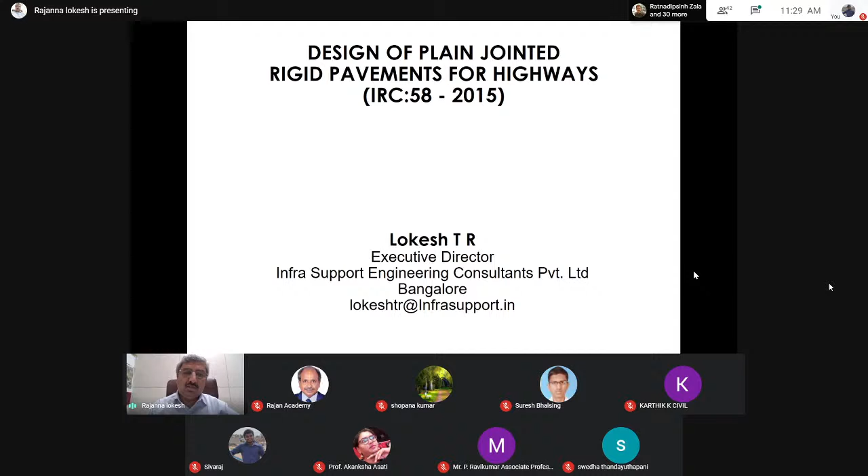IRC 58 2015 was first scheduled. The IRC code was first given by Indian Roads Congress in the year 1974. Currently we have the latest revision, IRC 58 2015. The biggest difference between the earlier version and this version is we are now having a laden commercial vehicle weight varying from 8.1 to 10.2 tons. So this will be my presentation structure for the day.

We will know what are the different types of pavement in the introduction, and what are the different types of concrete pavements that a designer can design, and what is the scope of IRC 58 2015, design of rigid pavements as per IRC 58. We will also take up a small case study, because along with the code, IRC 58 has also supplied an automated Excel sheet where you can input all the required design parameters and arrive at and check the design requirement.

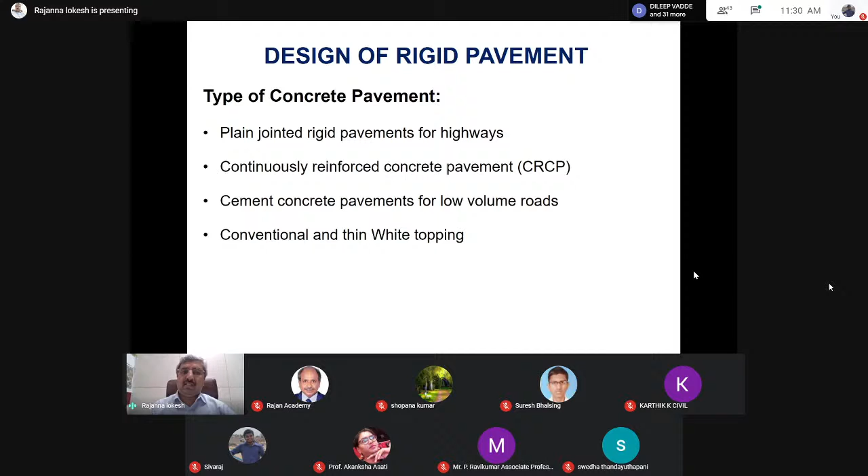When it comes to the different types of concrete pavements that a designer has the privilege to work with in the Indian context, we have plain jointed rigid pavement for highways - state highways, national highways, as well as expressways; continuously reinforced concrete pavement, also called CRCP; concrete pavement for low volume roads; and conventional white topping, or thin and ultra-thin white topping. This white topping topic will be discussed in detail by my next speaker, Sri Jaishankar sir. So we will just understand the various differences among these types of pavements.

There is a transverse joint at every 4.5 meters, also called a dowel joint, with dowel bars provided. There will be a longitudinal joint at a spacing of 3.5 meters, running parallel to the center line of the road, which makes the pavement into slabs, or panels, generally sized 3.5 by 4.5 meters.

The top surface of the pavement will have a texture, either in the longitudinal direction or in the transverse direction. In most Indian roads, you can see the texture in the transverse direction, but abroad, we can see some roads with longitudinal texturing.

The thickness of concrete pavement, designed as per IRC 58, generally varies between 150 mm or 200 mm up to 350 mm. The grade of concrete generally used for pavement concrete has a minimum of M30, and can go up to M50 or M60, but in most cases M40 is the pavement quality concrete, or PQC, that is always adopted.

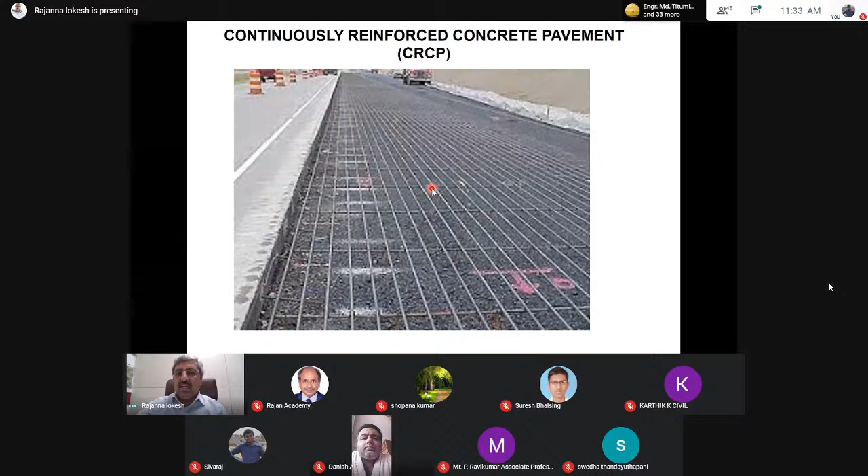All other parameters with respect to conventional pavement remain the same, like pavement quality concrete and texturing. The only difference is that providing the transverse and longitudinal reinforcement results in a reduction of pavement thickness.

We are supposed to ascertain the existing strength of the flexible pavement, then remove functional failures such as light cracks on the surface by a process of milling, then go with the concrete overlay. For the concrete overlay, the pavement quality concrete remains as M40, or minimum grade is M30.

These are the various codes available for the design of concrete pavement: IRC 58-2015 guidelines for the design of plain jointed rigid pavement. IRC 118 helps us understand design guidelines for continuously reinforced concrete pavement. Low volume roads can be designed using IRC SP 62-2014. White topping design can be carried out using IRC SP 76-2015.

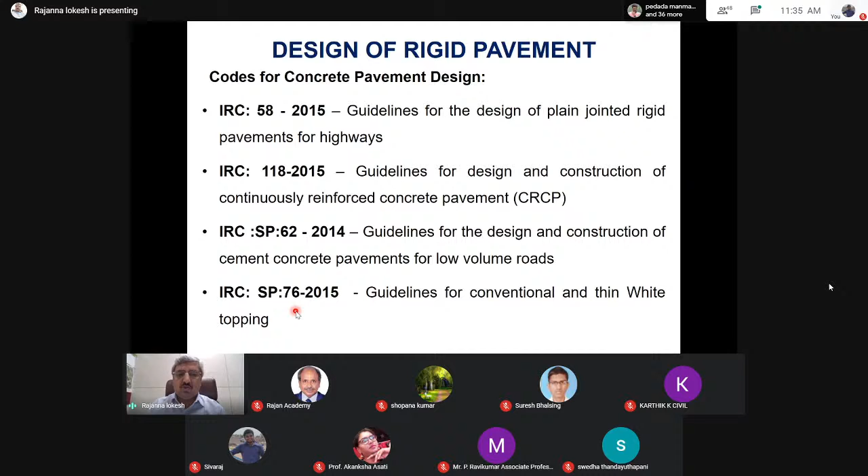When it comes to the scope covered in IRC 58-2015, it is the design of plain jointed concrete pavement with and without tied concrete shoulders. This is applicable for roads where the commercial vehicles per day is more than 450, commercial vehicles meaning individual vehicles weighing more than 3 tons.

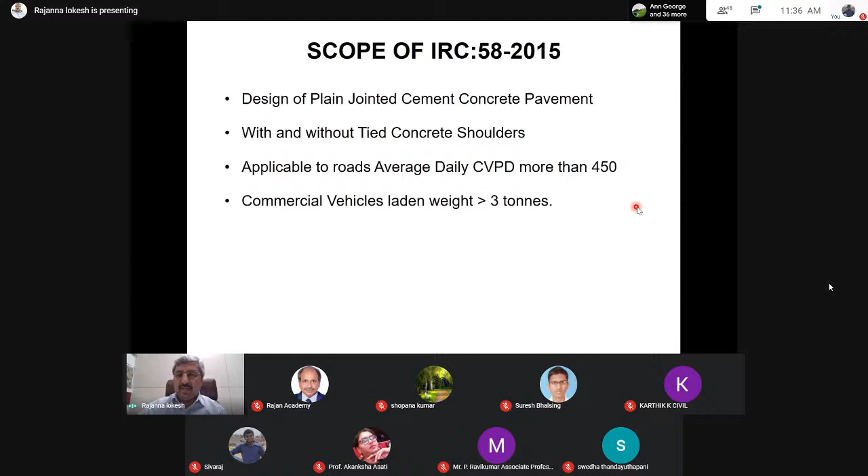When it comes to concrete pavement, there are several types that can be designed depending upon the climate, availability of material, soil type, and the experience that a designer has.

As I told you, the economy of the pavement design is all the more important. So depending upon the cost, the suitability of materials that can be used for a debonding material can be varied.

What are the factors that govern the design of a rigid pavement? First is the design period, design commercial vehicles, composition of traffic in terms of single, tandem, as well as tridem, multi-axle, axle load spectrum, tire pressure, lateral placement characteristics, directional distribution, strength of foundation, and climatic conditions. These are the factors that govern the design of rigid pavement.

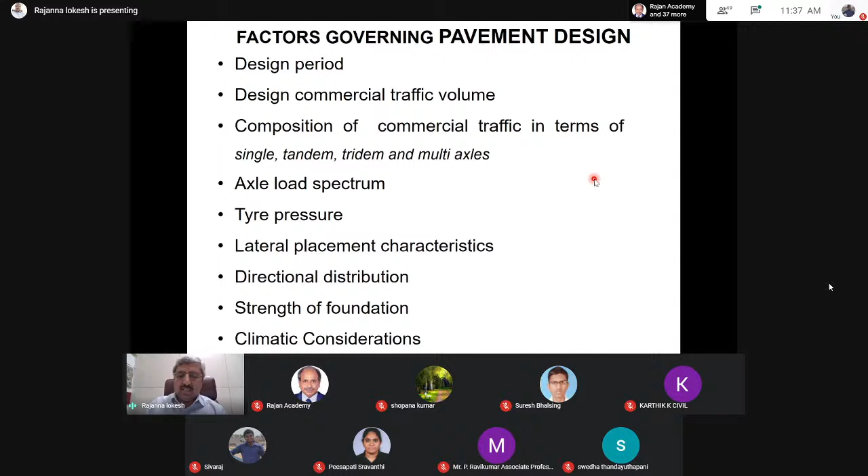Let us see individual parameters. Design life: generally, concrete pavements, unlike flexible pavements which are designed for a 15-year design period, are designed for a span of 30 years.

It is all the more important for us to judge the design period depending upon the traffic volume, uncertainty of traffic growth, capacity of roads, and possibility of widening of the road.

Assume there is an existing road with two lanes having some capacity. If it is to be designed for a concrete pavement of 10-meter width, as far as IRC 73 is concerned, the minimum width of carriageway for a two-lane is 10 meters with 1.5 meters as paved shoulders. Considering it as 10 meters, if you decide to go with concrete pavement for a two-lane, and if based on capacity it warrants a 4-lane in the next 5 years or less than 10 years, it would be difficult to convert the bi-camber into a unidirectional camber, which is given for a 4-lane road.

Thus, it is all the more important to assess the traffic volume, traffic growth, as well as widening that is going to happen in the next 15 to 30 years.

Then, it is important to understand the design lane. When it comes to IRC 58 designs for a two-lane road, both lanes are considered as design lanes, whereas for 4-lane or multi-lane roads, the outer lane is considered as the design lane. This is because it is always expected that heavy traffic will take the outer lane and faster moving vehicles will take the inner lane.

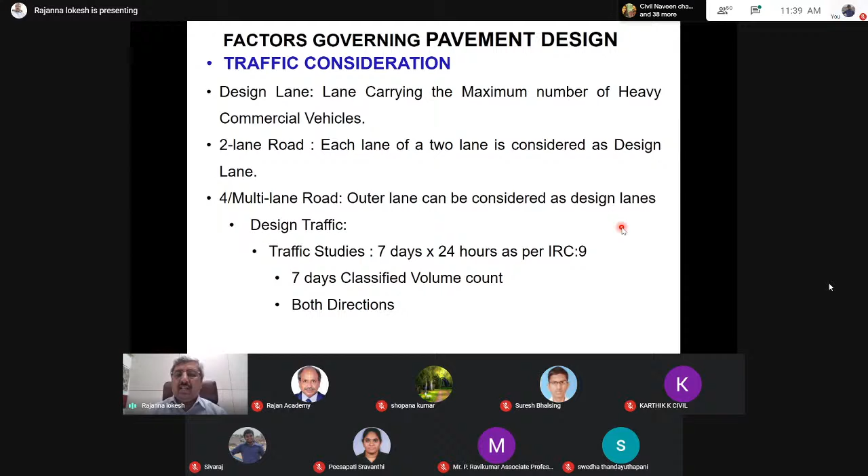It is important for us to study the traffic, based on studies for 7 days, 24 hours as per IRC 9. The traffic studies shall be carried out as classified volume counts in both directions.

Traffic growth rate is an important parameter in deciding the base traffic as well as the projected traffic for the next 30 years. As per IRC 84, which is the codal provision for the design of 4-lane highways, 5% is the recommended growth rate, which can also be determined using appropriate methods.

Traffic count is required to be carried out both in day and night, because day traffic will be responsible for bottom-up cracking, whereas night traffic will be responsible for top-down cracking.

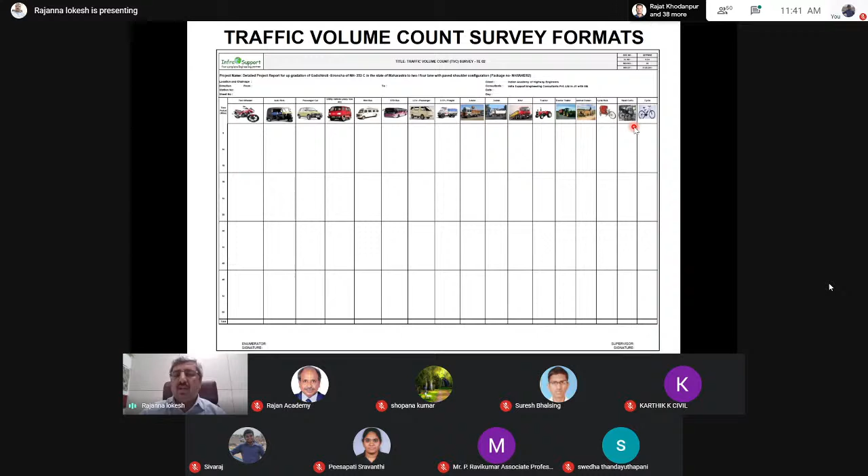Here you can find all the different categories of vehicles that should be counted, which is also the reason it is called classified volume count. So these are the various categories of vehicle.

Some of the vehicles will not have any role to play in the design of rigid pavement, but at the same time, these are the categories of vehicle which help us understand the capacity of the road. Whereas those vehicles which are more than 3 tons, specifically buses, 2-axle, 3-axle, and multi-axle trucks, will definitely contribute their presence in the design of concrete pavement.

So this is how the formats will be filled in at the site, wherein for every 15 minutes the count will be summarized, and for 1 hour we are going to summarize the data.

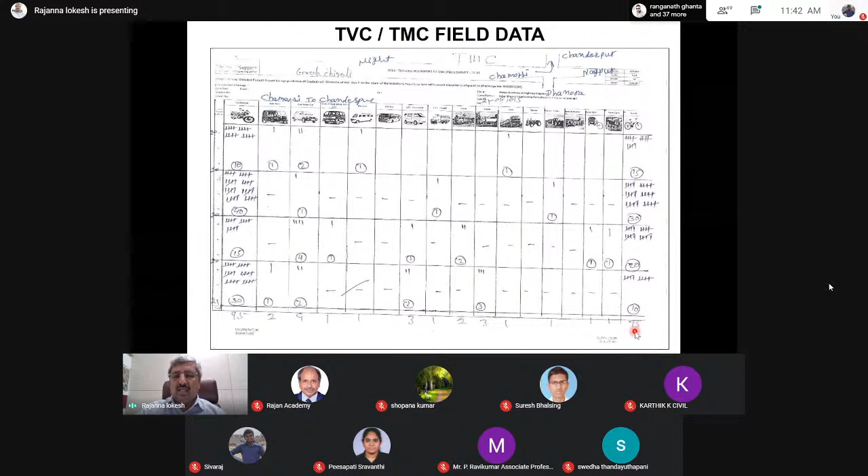Another important survey that has to be taken care of during the traffic survey is the origin and destination survey. Origin and destination survey generally will help us in arriving at the growth factor for the period.

Generally, the roadside interview method will be followed in conducting origin destination survey, where a series of questions will be asked to the driver, like what is the duration, what is the frequency in which he uses this road, what is the commodity, from where he is coming, and where it will be delivered, what is his duration of utilizing this facility.

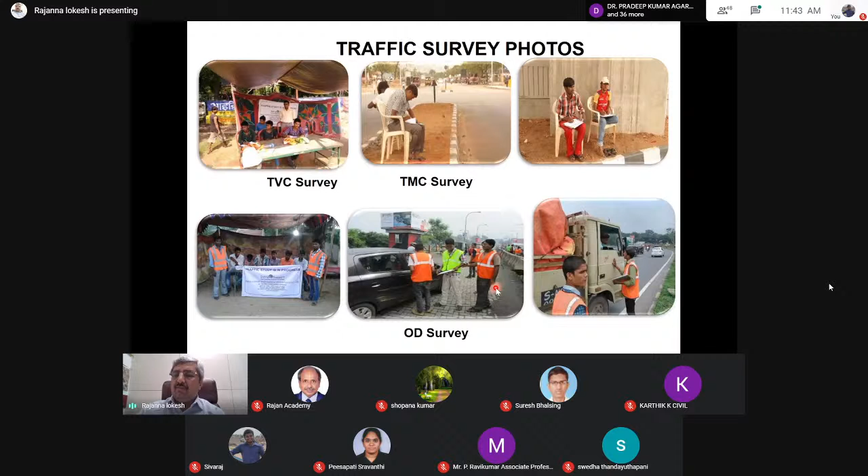So like this, a series of questionnaires will be done. This data will also be useful for us to analyze the OD matrix as well as OD zoning, from which we can arrive at the growth factor.

Then coming back to lateral placement characteristics, it is something like when a loaded truck moves towards the edge of the pavement, the structural stresses caused by the axle load at the bottom for bottom-up cracking will be much higher.

So it is always advisable to keep the vehicle at least 150 mm away from the longitudinal edge, so that the stresses at the edge get reduced. That is the reason even when we design the pavement, after which we design the dowel bars, the first dowel bar is kept at a distance of 150 mm from the edge, so that the edge flexural stresses are reduced.

For the design consideration, as per IRC 58, for 2-lane, 25% of the total commercial vehicles on both directions are considered. Whereas in case of 4-lane and multi-lane design of rigid pavement, 25% of the total traffic, which is predominant on the directional movement, is considered for the design.

Then coming back to the design parameters, top-down cracking. The design traffic for top-down cracking is a fraction of the design considered for bottom-up cracking.

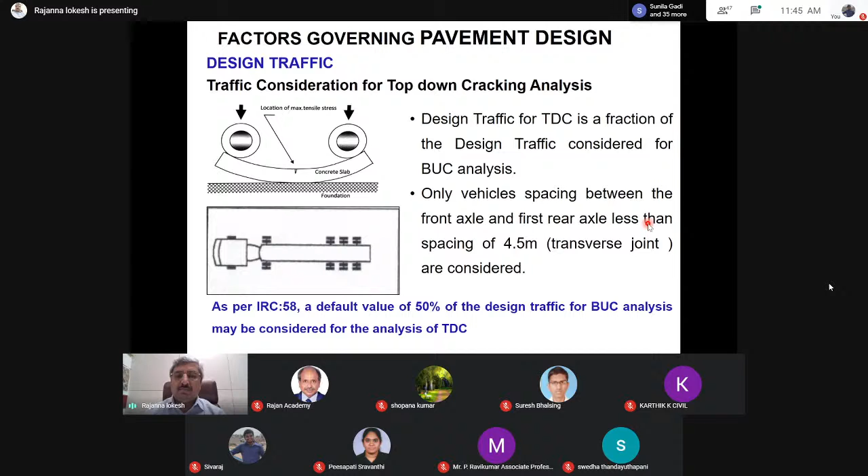Then another important parameter to understand is to find out the expected number of repetitions in terms of MSA. Though this does not play a very vital role in the design of rigid pavement, it is important to back-calculate and check what will be the front axle weight that is going to be taken into account in case of bottom-up fatigue damage.

When it comes to axle load survey, though the legal axle weight for single, tandem, and tridem vehicles is around 10.2, 19, and 24 tons, it is always observed at the site that the vehicles are being loaded much higher than the legal limits. So it is important for us to capture these axle loads from the site, and that will form an input for the design of rigid pavement.

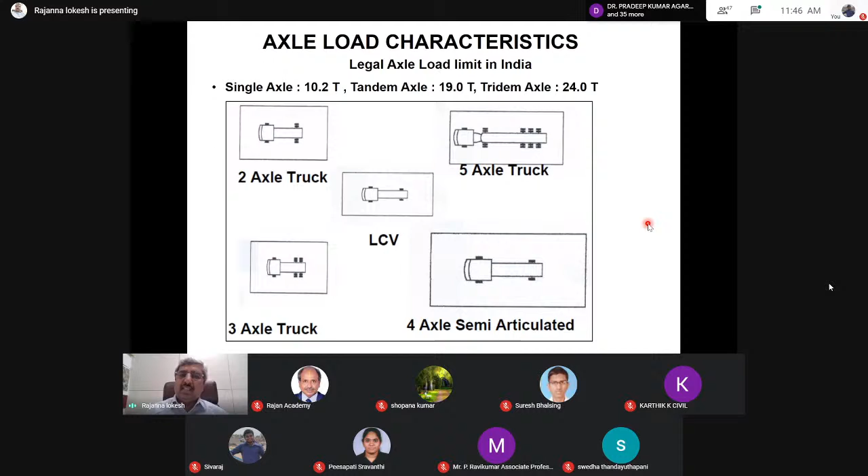So in order to do so, we are supposed to carry out a survey called axle load survey. In this axle load survey, the sample size, if the commercial vehicles are more than 6,000 CVPD per day, the sample size shall be 10%. A sample size of 15% shall be considered for CVPD more than 3,000.

The sample size of 20% shall be considered if the commercial vehicles per day is less than 3,000. The duration of the survey, generally, should be 48 hours.

The tire pressure is also an important parameter, which will vary from 0.7 MPa to 1 MPa, whereas for design we take around 0.8 MPa. But when the concrete pavement is designed for a thickness just above 200 mm, the effect of tire pressure is much negligible.

So this is an arrangement where we can understand how the axle load survey will be done. This will be digitally attached, you can see a wire which will be attached to a digital indicator. This is called a weighing pad, which will be placed close adjacent to the edge of the existing road shoulder.

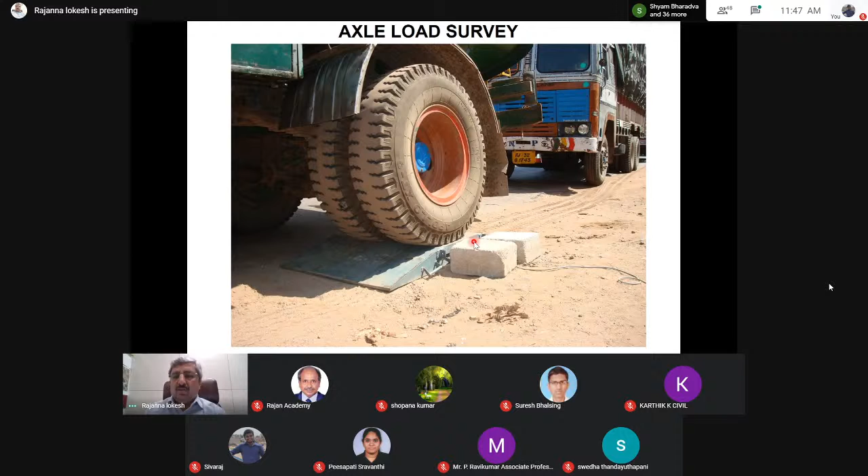Each vehicle is allowed, one axle, one wheel is allowed to pass through this pad. We are going to measure similarly all the wheels of the axle, as you can see here. Then it is multiplied by 2 to get the axle load weight.

Once the axle load weight is obtained from the survey data of 48 hours, we are going to have a matrix showing the single axle weight varying from 18.5 tons to 19.5, down to less than 8.5 tons. We are going to have a bifurcation of what is the percentage or frequency in which we have the data. Once this data is ready, it will be used as input for the design of rigid pavement.

Then the two critical stresses considered for the design of rigid pavement are bottom-up cracking and top-down cracking. Bottom-up cracking occurs during the daytime. The flexural stress at the bottom layer of the concrete slab is maximum during the day when the axle load acts on top, due to which the beam tends to sag, which induces a crack from the bottom.

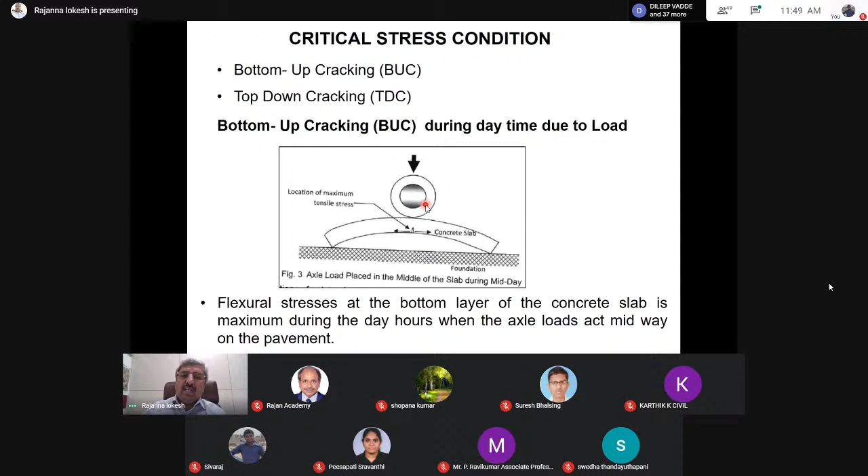Whereas in top-down cracking, there will be a variation in temperature with respect to the top and bottom at night, where the temperature will be cooler at the top and a bit higher at the bottom. Then there are chances that the slab gets curled. Though we have provided dowel bars as well as tie bars, it tends to curl, which is defined as top-down cracking.

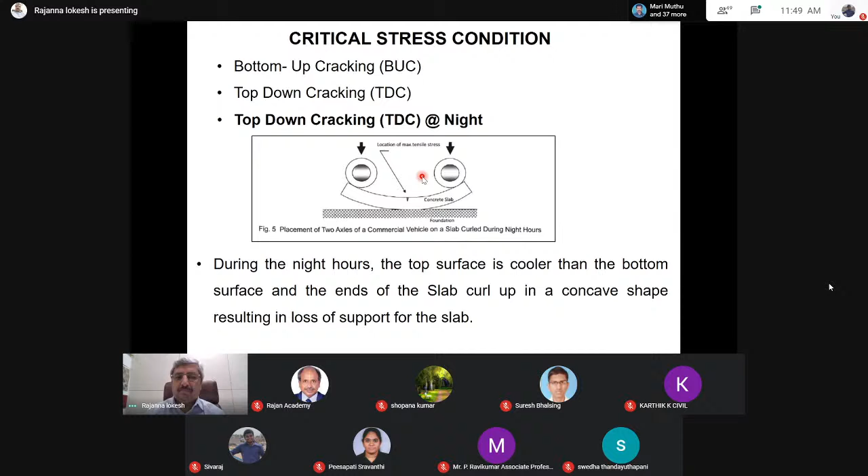For the top-down fatigue cracking analysis, it is all the more important for us to study the spacing between the first wheel and the first axle and the rear axle, and what is the difference with respect to the length of the panel.

Generally, 3.5 by 4.5 meters is the panel we consider for the design. In all cases, the wheelbase of trucks will vary from 3.6 to 5 meters. Those axles which are more than 4.5 meters apart will not contribute much to top-down cracking, as there will be a dispersion of load on the two slabs.

Then the other important parameter in the design of concrete pavement is temperature control, because most of the time the concrete pavement will have an impact of temperature. The temperature difference between the top and bottom fibers of the concrete pavement causes slabs to curl. The various reasons for temperature difference are due to solar radiation received by the pavement surface, wind velocity, latitude and longitude of the location, elevation, and all the geographical features of the location.

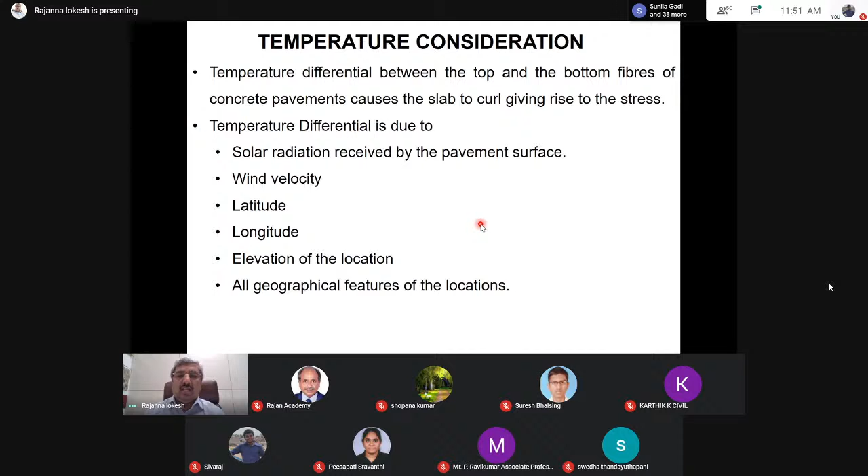So for design purposes, when it is difficult for us to measure all the parameters just discussed and consider them in the design, as per IRC 58, it is recommended for various thicknesses of pavement for various regions in India. We can have the difference of temperature given in the table, and considering the state in which the project is taken up and the thickness for which the pavement is designed, the variation in temperature can be considered for the design straight away.

It is ideal that there will be a variation in temperature on a daily basis as well as hourly basis. So IRC specifies, in order to check the variation in temperature, 6 hours in a day and 6 hours in the night shall be considered for the design. 6 hours from 10 a.m. to 4 p.m. is the daytime, which we refer to as the stresses during the day, and during the night it can be between 0 a.m. to 6 a.m.

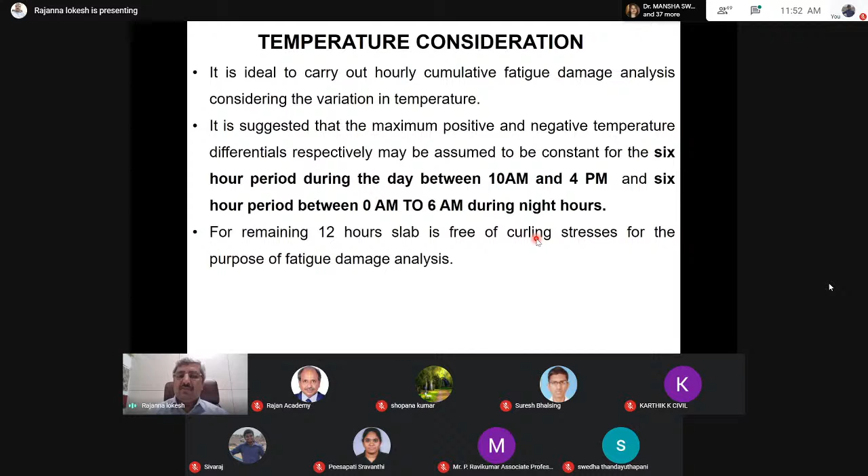The next important parameter in the design of concrete pavement is subgrade strength. When it comes to subgrade strength, it is required to analyze the effective CBR of the subgrade. This involves analyzing the existing CBR of the OGL sample, and the expected CBR of the borrow material. Knowing these two values, we can arrive at the effective CBR.

In turn, we can also calculate the modulus of subgrade reaction of soil, K, for the subgrade. Assuming a CBR of OGL around 7%, and a borrow material of 500 mm thickness with a CBR of 12, 13, or 14, we can find the effective CBR. It will be around 12. Considering 12 as the effective CBR, the K of subgrade can be arrived at.

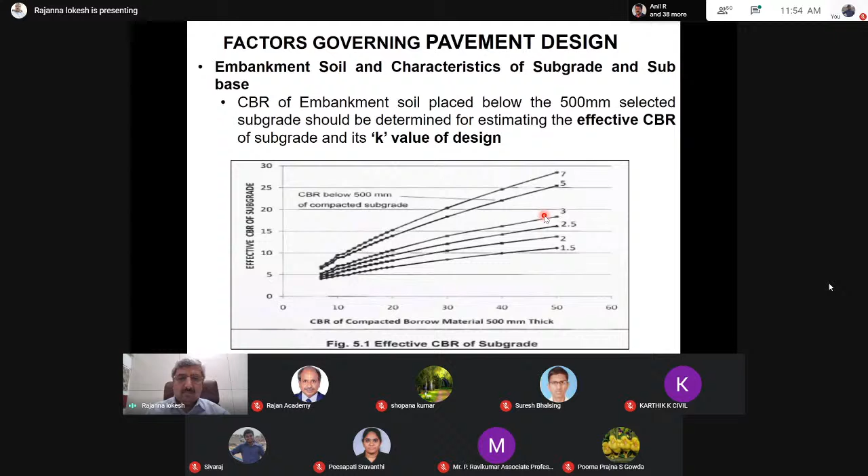Coming back to subgrade material, it can be native soil. If you get good soil at OGL level, it can be used as subgrade material, or it can also be used as borrow material. The only requirement is that the subgrade should have a density of 1.75 grams per cc, and CBR shall be as per the design requirement. It is important to find the K value by conducting the plate load test.

Since the K value is an important parameter for the design of rigid pavement, and is tested and obtained from the plate load test, which is time consuming and expensive, IRC 58 also allows us to know the K value from the CBR, the California bearing ratio, which is a 4-day soaked CBR test. Based on this test, we can finalize what the K value is. For example, if our effective obtained borrow earth has a CBR of 10%, then our K value will be 55 MPa/m.

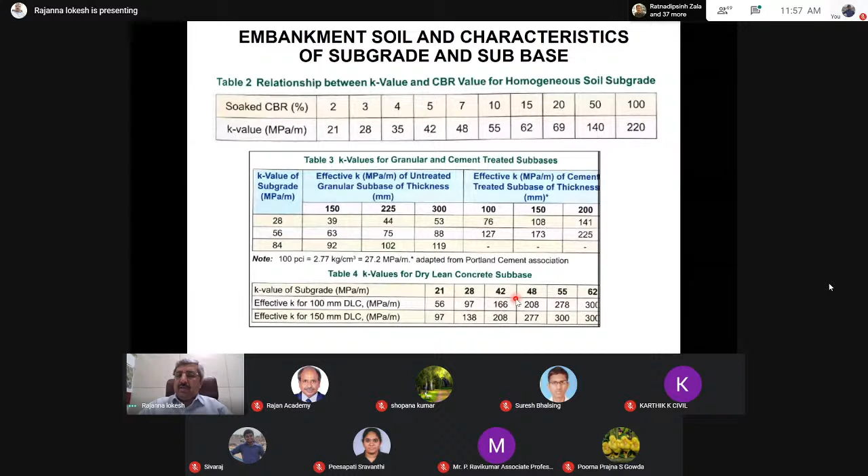As I mentioned in the initial slide, the separation membrane can be either a polyethylene membrane or a bituminous concrete layer of 30 mm or 40 mm, or even a wax-based compound can be treated as a debonding layer or separation membrane. The interface between the concrete slab and the dry-lean concrete should be smooth to reduce inter-layer friction and allow relative movement of the slab and DLC layer, so as to prevent reflection cracking in the slabs. The debonding interlayer can be a 125 micron polyethylene sheet.

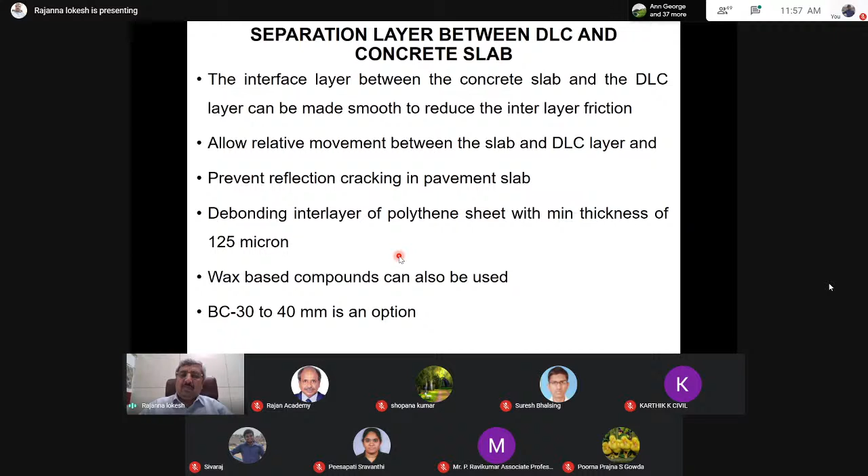Then comes concrete strength. Flexural strength of concrete is required for the design of concrete pavement. This can be obtained by casting concrete cubes and checking them for strength. IS 456-2000 helps us derive the characteristic flexural strength from characteristic cube compressive strength, using 0.7 root FCK, where FCK is the grade of concrete. If we use M40 grade concrete, FCK will be 40, so 0.7 root 40 gives us the flexural strength of concrete. In all likelihood, the flexural strength of concrete for a PQC of M40 grade is considered as 4.5 MPa.

When it comes to flexural strength, it is important to find it with respect to the target mean strength, which can be arrived at using the formula.

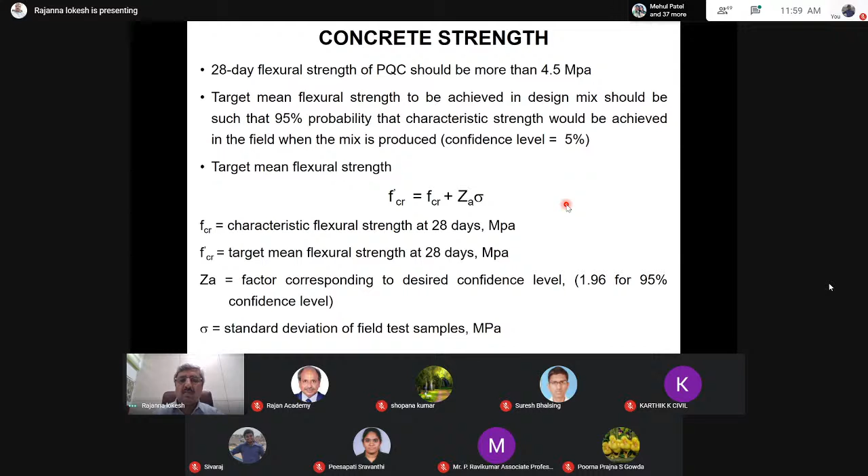The important parameters that also count are the material properties of concrete, that is elastic modulus as well as Poisson's ratio. As the elastic modulus increases, the Poisson's ratio decreases. Elastic modulus is a parameter dependent on the grade of concrete. If PQC of M40 is used, the E value can be 30,000 MPa. If the grade of concrete varies, it can be calculated using the equation 5000 root FCK.

Another parameter in the design is thermal expansion, lambda. Generally, the coefficient of thermal expansion of concrete is dependent greatly on the type of aggregates used in the concrete. For design purposes, as per IRC 58, 10 into 10 power of -6 could be adopted.

Fatigue behavior of concrete pavement. Due to repetition of flexural stress application by traffic movement, there is fatigue damage caused on the concrete surface in the form of micro cracks. The ratio between the applied flexural stress and the flexural strength of concrete is called the stress ratio. It is always felt that if this ratio is less than 0.45, it will have much higher fatigue life.

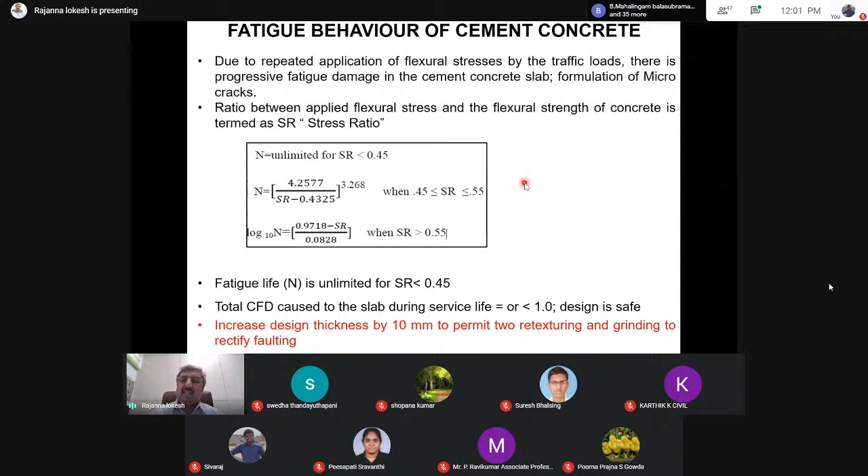Computation of flexural strength. These are the various computations that should be checked using IIT Rigid, wherein we place a single axle on a panel of 3.5 by 4.5, then a tandem, as well as tridem axle vehicles. Similarly, the whole vehicle is placed on one slab, based on the possibility of placing it with respect to the dimension of the vehicles.

We are going to analyze the stress calculations. Stress calculations are analyzed for bottom-up cracking with respect to tied concrete shoulders and untied concrete shoulders with single as well as rear and tandem axles, and tandem for tied shoulders.

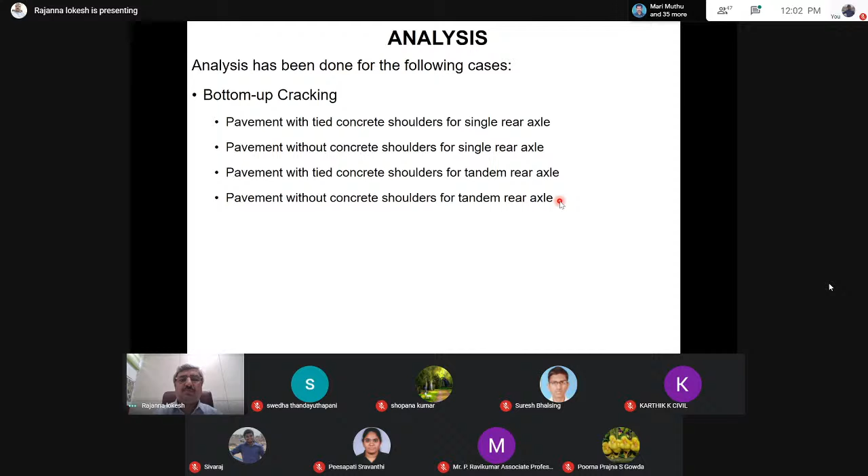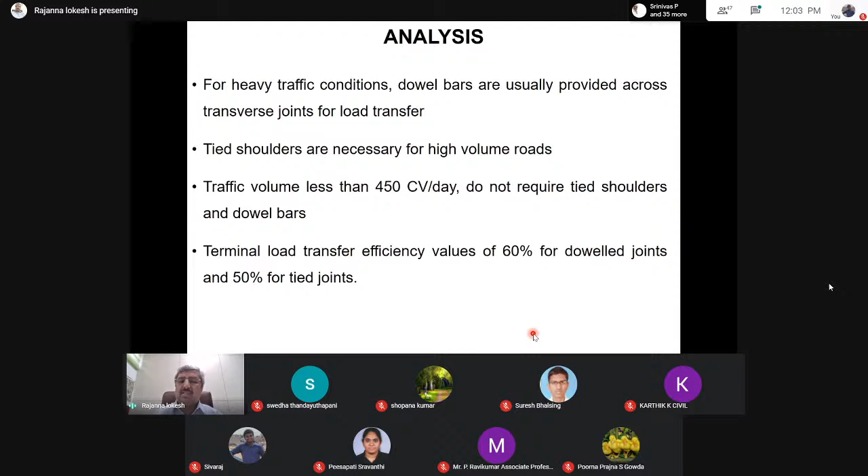For heavy traffic conditions, dowel bars are provided across the transverse joint. Tied shoulders are necessary for high volume roads, as this will reduce the thickness of PQC. For traffic less than 450 commercial vehicles, it is not required to provide any tie bars, and we need not go with IRC 58 design — a different design can be used as discussed earlier. Then the terminal load transfer efficiency values are 60% for dowel and 50% for tie joints.

Then comes the issue of fatigue damage analysis. So what is fatigue? Fatigue, abbreviated as NF, is the number of stress cycles of a specified character that a specimen sustains before failure. Generally, the cumulative fatigue damage for bottom-up cracking and cumulative fatigue damage for top-down cracking should be less than 1 for a safe design.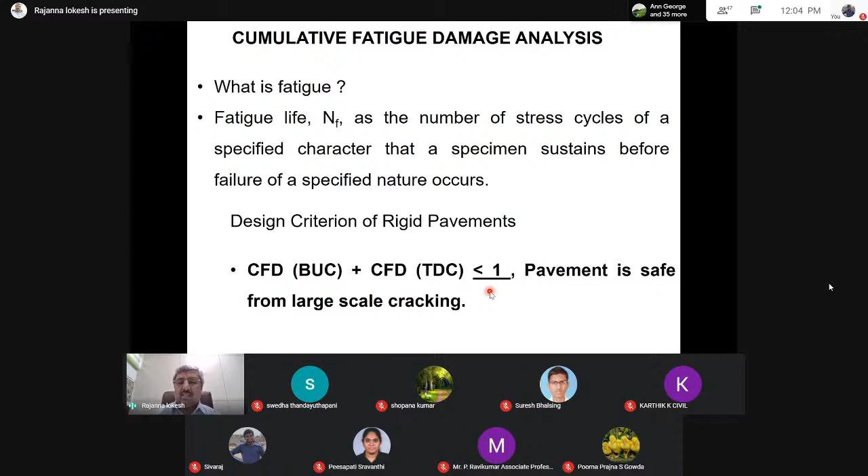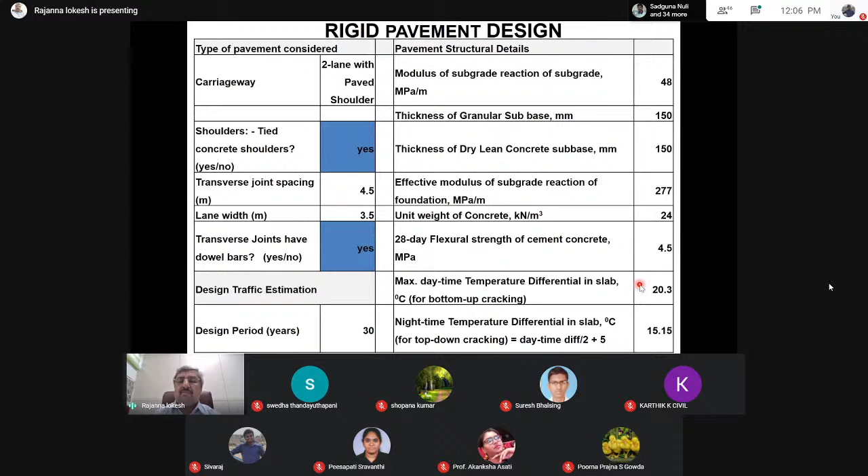Then temperature difference, depending upon the zone in which we are working, we can take it from the table. So two-way commercial, what is the commercial vehicles that we are going to have? Growth rate of 5%, which I mentioned, can be inputted. Then these are the various parameters that should be included.

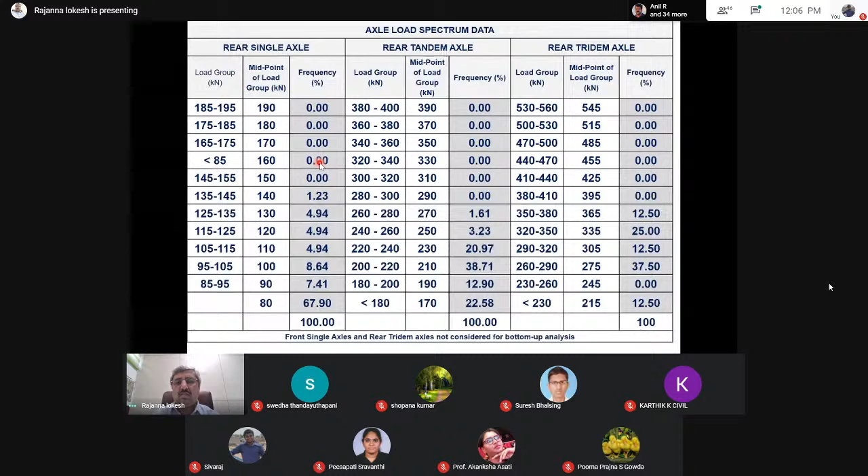This is a simple Excel file. Once you input all the required data, it can be included in that.

Coming back to joints, there are three types: contraction joint, expansion joint, and longitudinal joint. Contraction joints will be provided at every 4.5 meters with a dowel bar. Expansion joint depends on the project site; generally expansion joints are provided where there is an existing culvert, minor bridge, major bridge, or any structure. Longitudinal joints are provided at every 3.5 meters with a tie bar.

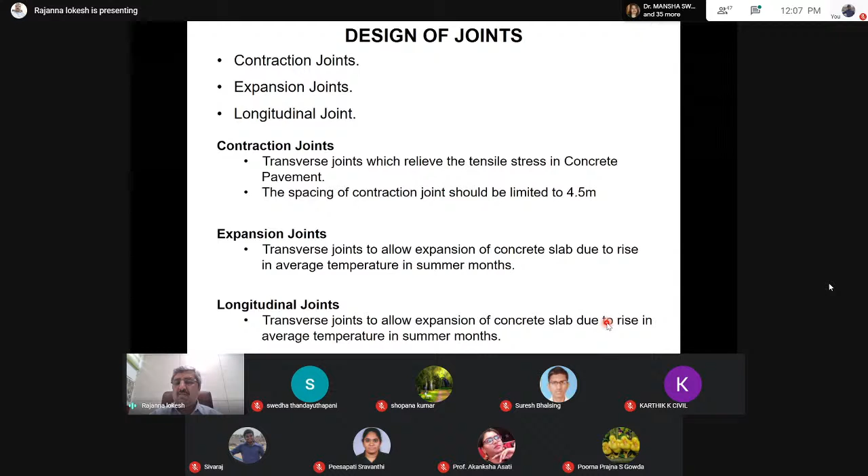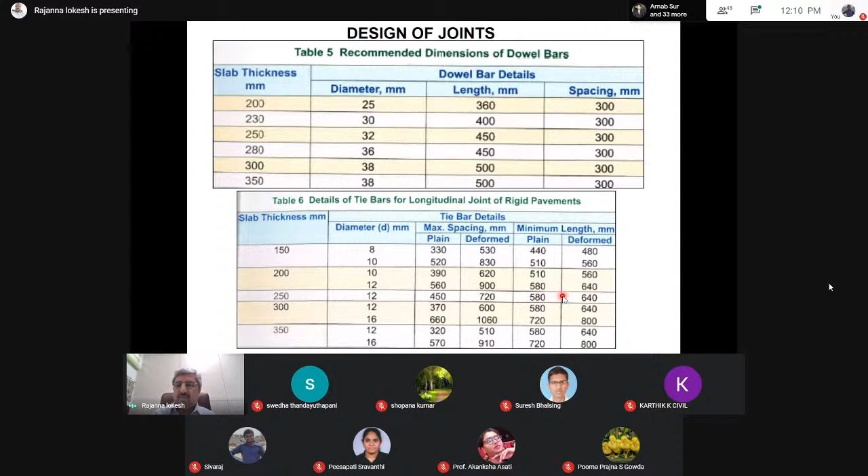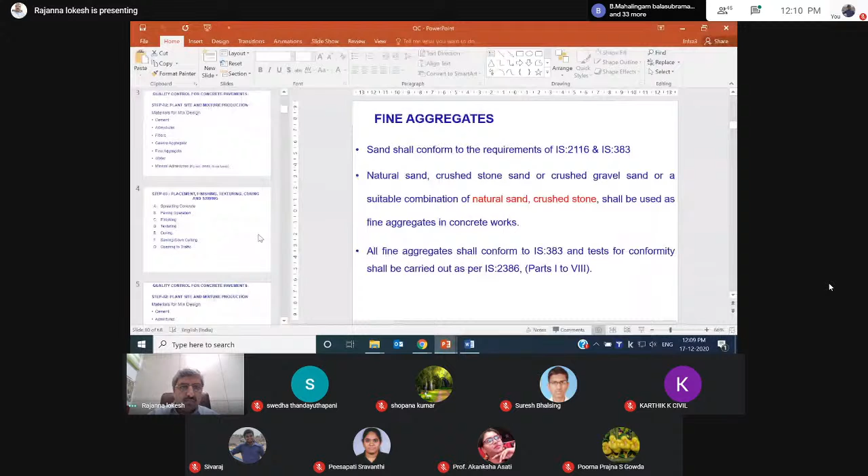So I will just quickly run through the various quality control issues on concrete pavement. Quality control can be done in 3 stages: Stage 1, pre-paving activity; Stage 2, plant and mix production; Stage 3, placement and finishing and curing.

In step 1, it will be preparation of surface, then provision of utility ducts if any. Milling will come only in case of white topping; profile correction and milling are both parameters of white topping. Then fabrication of side shutterings as well as mix design.

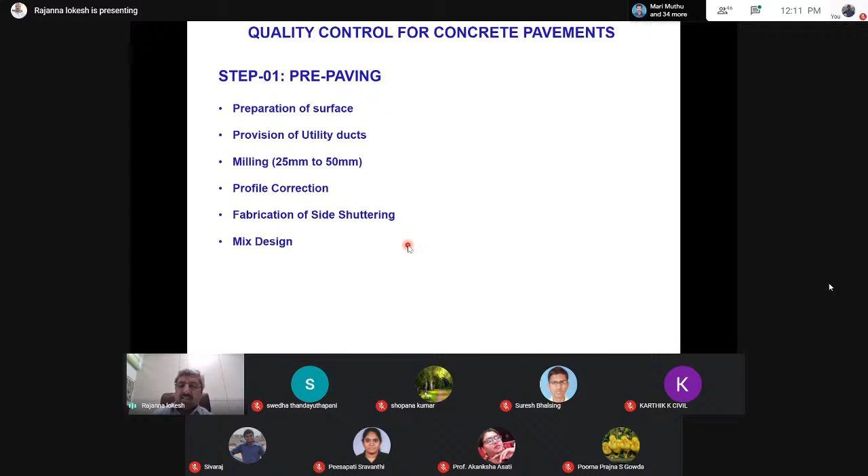Step 2 is plant site and mixture production. Materials for the concrete mix design will be cement, admixtures, fibers, coarse aggregate, fine aggregate, water, and mineral admixtures. Stage 3 is placing, finishing, texturing, curing, and sawing. In this we will discuss spreading concrete, paving operation, finishing, texturing, curing, sawing, and opening to traffic.

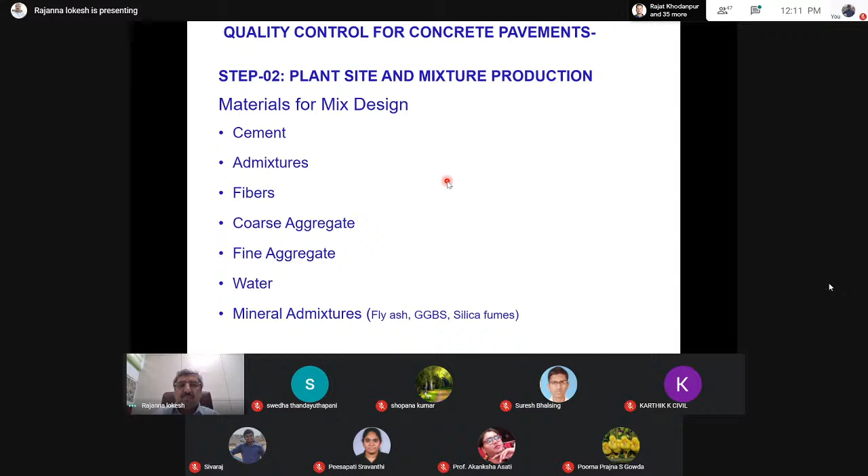So, in case of plant and mixture production, the materials we use are cement, admixtures, fiber, coarse aggregate, fine aggregate, water, and mineral admixtures. As we all know, concrete is a mixture of cement, air, water, sand, and aggregates. Generally, the percentage of air in concrete is around 3 to 6%, cement is around 10 to 12%, water is around 14 to 18%, sand is around 20 to 27%, and aggregate is around 40 to 45%.

So what are the different types of cement that can be used for production of PQC? It can be OPC of 33 grade, OPC of 43 grade, or OPC of 53 grade. Depending upon the project specifics, it can be sulfate resistant Portland cement, pozzolana based cement, slag cement like GGBS as a partial replacement, rapid hardening cement, or low heat Portland cement.

In most cases, we are going to use OPC 53 grade cement for production of PQC.

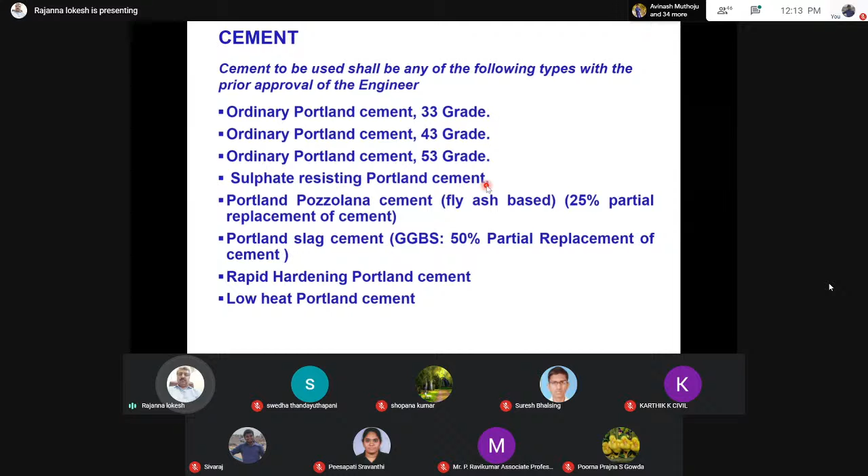The properties of cement shall be: initial setting time should be 30 minutes, final setting time shall be 600 minutes. Compressive strength of cement for 3 days shall be 23 MPa, whereas for 28 days it shall be 43 MPa. Specific gravity shall be 2.9 to 3, whereas fineness per square meter per square kg shall be 225 minimum requirement.

As I told, generally we can use 43 grade and 53 grade cement. In all possibility, the maximum cement can be 450 kgs per cubic meter, whereas for PQC, the minimum grade of cement is specified at 400 kg per cubic meter.

So it is important for us to get the manufacturer certificate before start of the work. Once the cement is procured at the site, it is important for us to check the compressive strength as well as setting time.

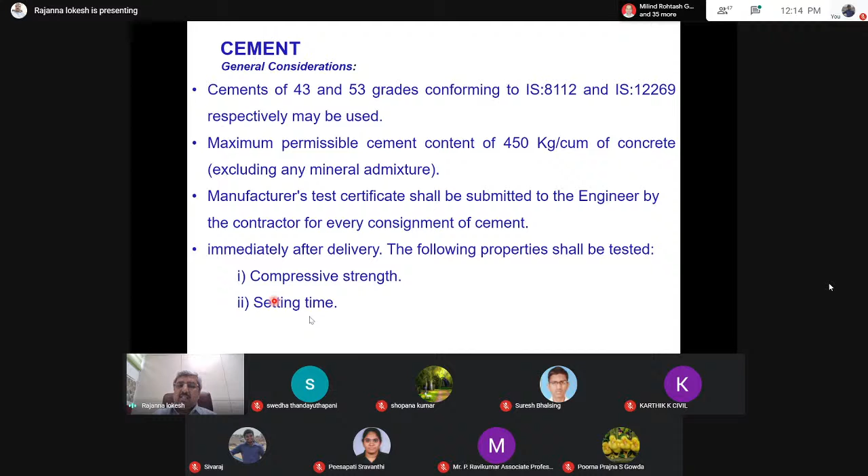The next important parameter is fine aggregate. Fine aggregate shall be in accordance to IS 2116 and IS 383. Fine aggregate can be natural sand, crushed stone, or a mixture of both. Now, most of the states have banned natural sand mining, so we can definitely go for manufactured sand, also called crushed sand.

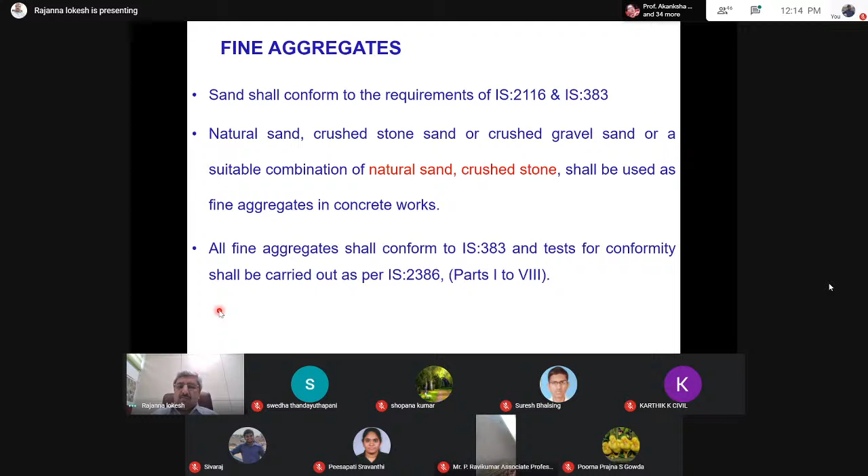So these are the various zones that are available as per IS 383: Zone 1, Zone 2, Zone 3, and Zone 4. The additional information that has been leveraged for manufactured sand is that for 150 micron passing, an additional increase of 20% is permitted as per IS 383 for manufactured sand.

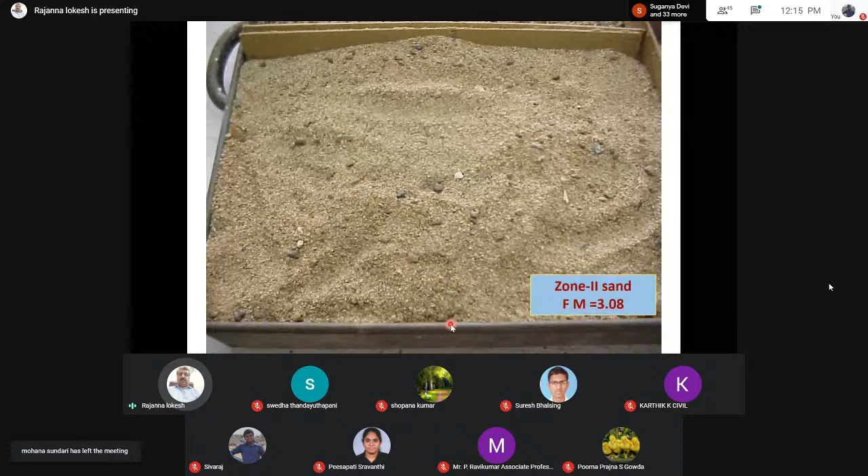So this is one photograph showing the sand with a fineness modulus of 3.08. This is for sand zone 2. You can see the variation in the grading of the sand, and also you can feel the value of fineness modulus variation. In all possibility, we are going to have a fineness modulus of 2.2 to 2.6 for fine sand, 2.6 to 2.9 for medium sand, and 2.9 to 3.2 for coarse sand.

Once the sand is procured, we have to check the fineness modulus. It is a simple test: take all the required sieves as per IS 383, take 500 to 600 grams of sand, sieve through all the sieve sizes, check what is the cumulative percentage retained. Sum of all divided by 100 will give us the fineness modulus.

With this fineness modulus number, we can check what is the type of sand that we are using, whether it is fine sand, medium sand, or coarse sand.

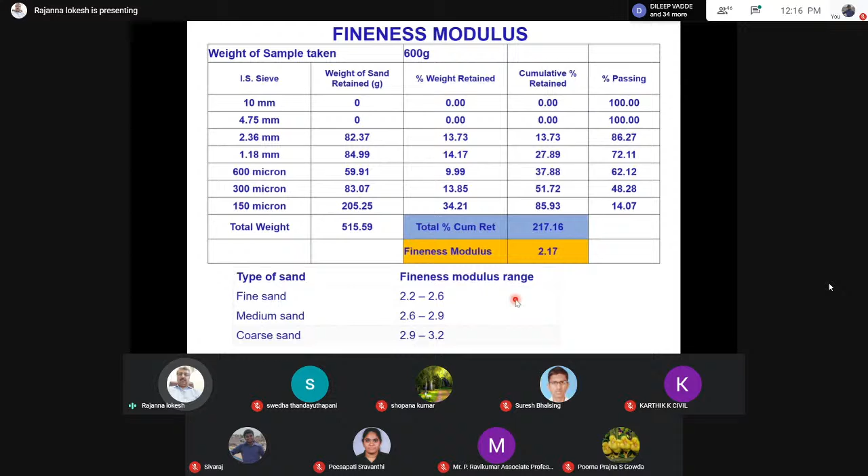Then another important test that should be carried out on sand is silt content. Silt content should be less than 6, maximum permitted is 6%. Take a beaker, fill it with sand, put the water, shake it rigorously, and allow it to settle for 24 hours.

You can see a small sedimentation accumulated on top of the sand. The differential distance between initial and final will give us the percentage. In order to accelerate the test faster, you can put a pinch of salt inside this and mix it rigorously so that we can get the result faster.

For fine aggregate, it is proposed to have zone 3 type of sand, where the specific gravity will be around 2.6, density of loose fine aggregate will be 1.46 gram per cc, and that of compacted will be 1.58 gram per cc. Silt content should be less than 6.

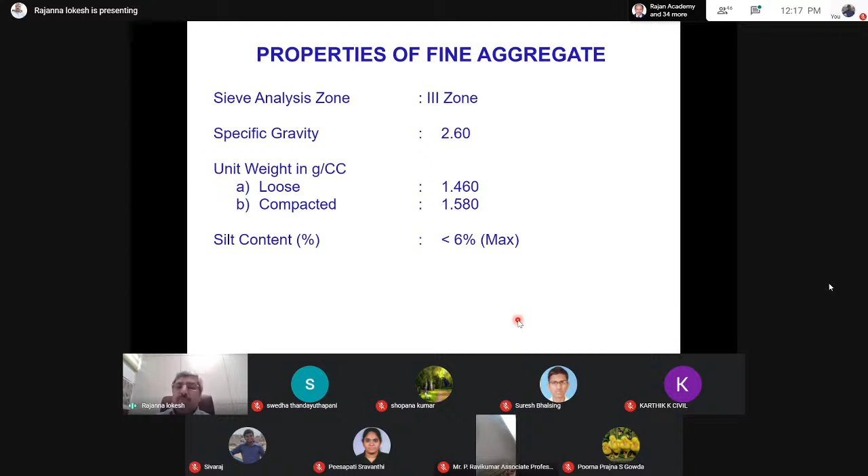Then the next important ingredient that goes into concrete is coarse aggregate. For applying concrete pavement, the coarse aggregate should be clean, hard, strong, dense, and non-porous. Any mica present in the aggregate should not be used. The aggregates that we are going to use for production of concrete should be inert; it should not react with the cement.

It comes in various shapes and sizes. The material ranges from fine particles to sand and larger coarse rock. Hard aggregates will give good strong concrete. It is always advisable to use aggregate having higher specific gravity.

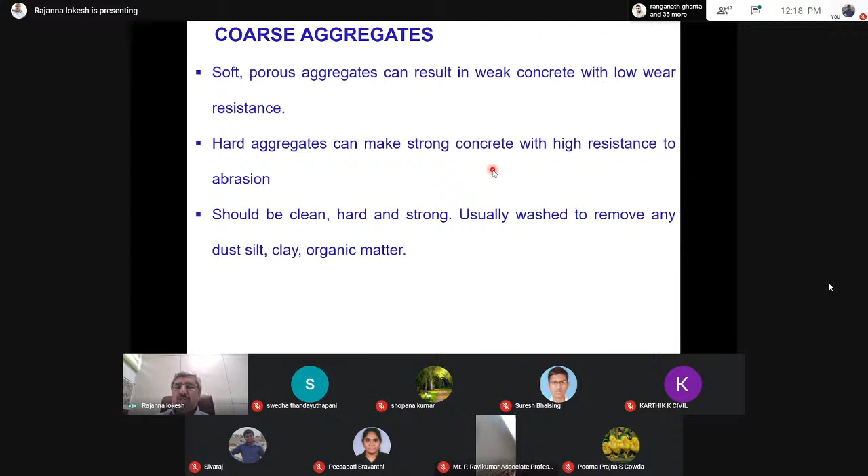So these are the gradations proposed as per IS 383. Any size of aggregates that we are going to procure at the site should be checked against the requirements specified here.

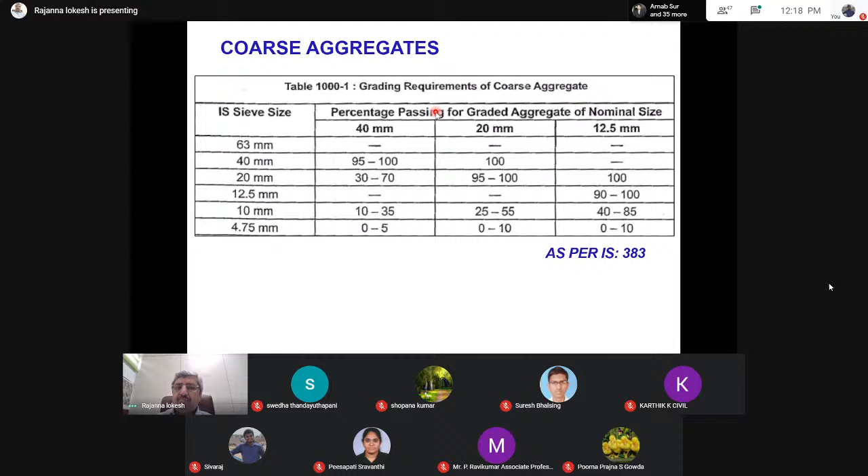Generally, the specific gravity of coarse aggregate will be around 2.65. The loose density will be 1.46 grams per cc, and compacted 1.63 grams per cc. The crushing value of 30%, impact value of 30%, and Los Angeles abrasion of 30% - these are the maximum limits.

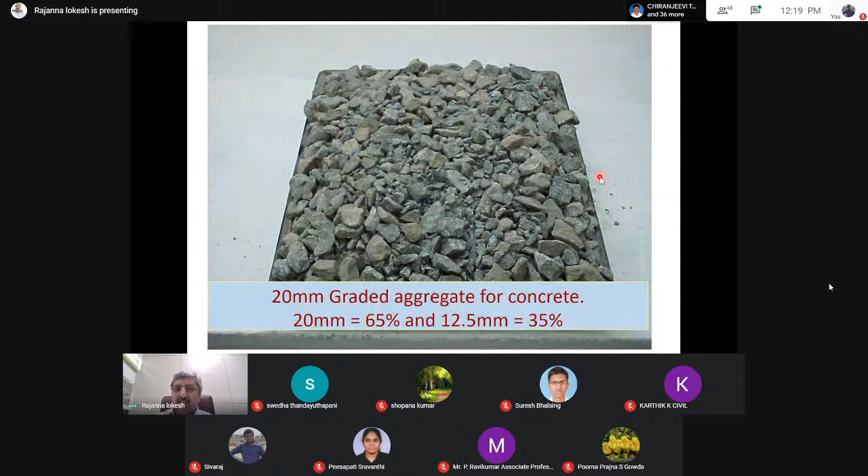So these are some photographs of 40 down material, 20 down, and a combination of it - so graded material of all types.

Though we carry out concrete mix design as per IS 456 for the required water cement ratio and slump requirement, it is important for us to check the gradation with respect to Class 600 of MoRTH, where we have the gradation requirements. This is the gradation requirement of the combined gradation for 40, 20, 12 mm as well as sand.

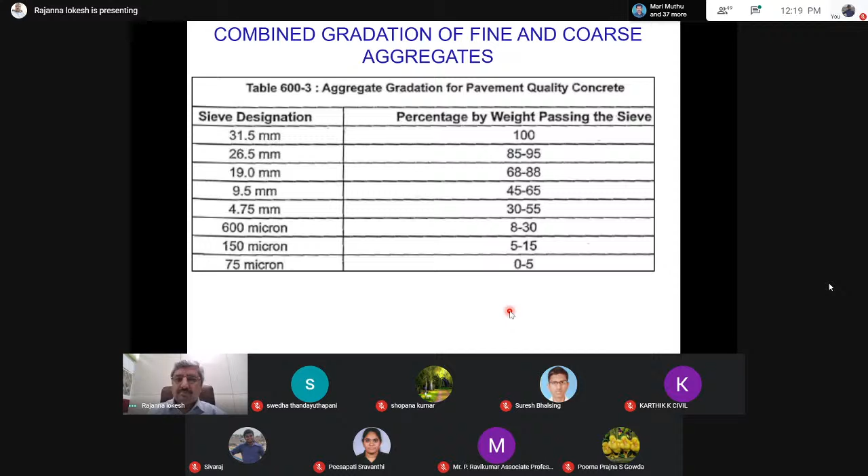So it is always better to follow the Rothfuchs method of mix proportion, wherein individual gradations are marked on the graph sheet, and we can also analyze how these individual gradations of material are behaving, whether it is single sized or different sizes or uniform. You can get clarity on this.

Then the next important parameter that plays in the design of concrete mixes is the admixture. As the requirement of slump for a PQC is around 25 plus or minus 10, and since we are using a slip form paver, it is all the more important to use a proper water reducing admixture in order to improve the workability. So any admixtures that we use should fulfill the requirement of IS 6925 and IS 9103.

The maximum percentage of admixtures that can be used is up to 2% by weight of cement. Admixtures will improve the workability of concrete and extend the setting time. Studies shall be carried out to ascertain the compatibility of admixture with the durability and strength. The type of admixture can be water reducing admixtures, retarding admixtures, accelerating admixtures, and air entrainment admixtures.

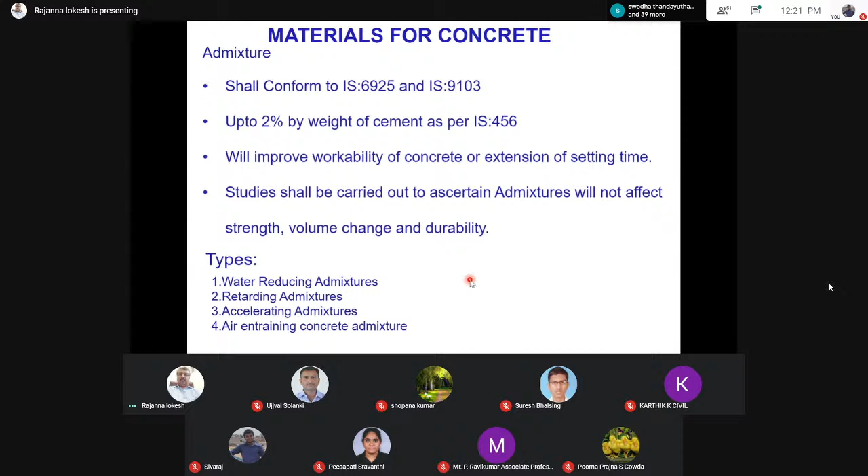When we are working in a very cold temperature zone, it is important for us to go with an air entrainment agent of around 6.5% to increase the durability.

The next parameter that gets into the concrete is fibers. There will be initial shrinkage cracks since we are not going to provide any reinforcement in the PQC. So it is advisable that during the process of hardening, there will be some shrinkage cracks. These shrinkage cracks can be reduced using steel, polypropylene, polyethylene, and nylon fibers. This will reduce the plastic shrinkage, initial plastic shrinkage cracks, and increase the durability.

The weight of fibers can be 0.2 to 0.6 percent by weight of mix. This is a dependent factor based on the slump of concrete.

The water that we use for concrete production should be potable. It should be clean and should not have any acids or alkalines. These are the tests that should be carried out on the water used for concrete production.

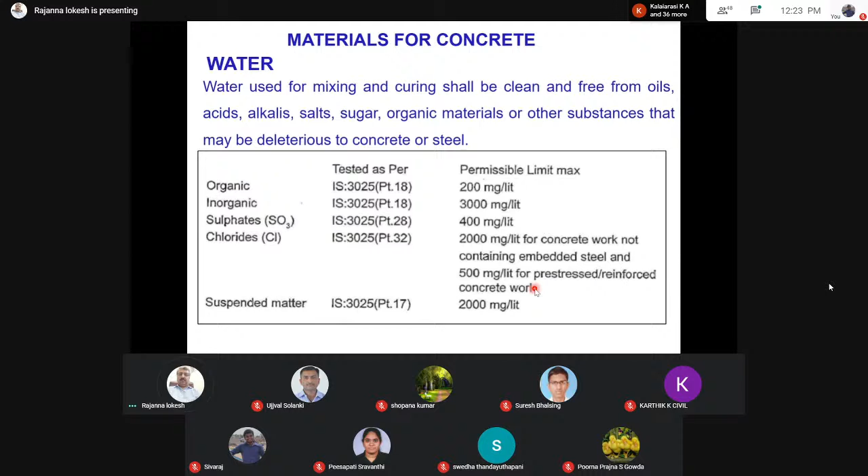As I mentioned, IS also specifies the utilization of cementitious material by reducing the cement content. It can be fly ash up to 25%, GGBS, as well as silica fume. Silica fume is generally used around 3 to 10% to get high strength concrete.

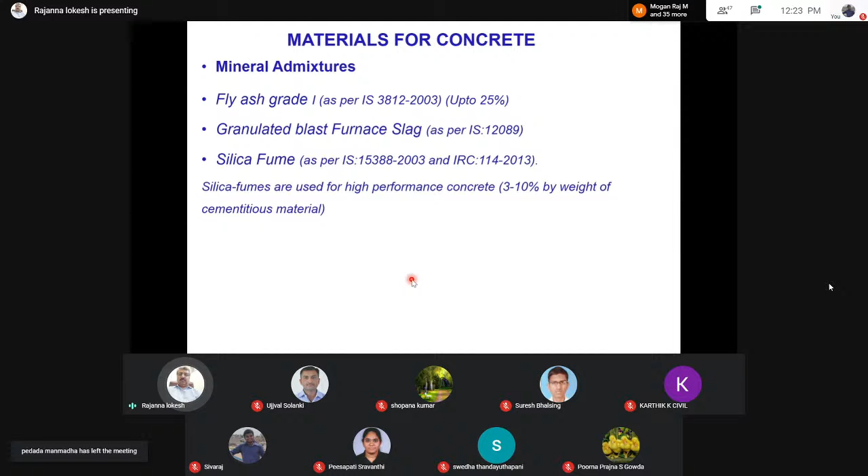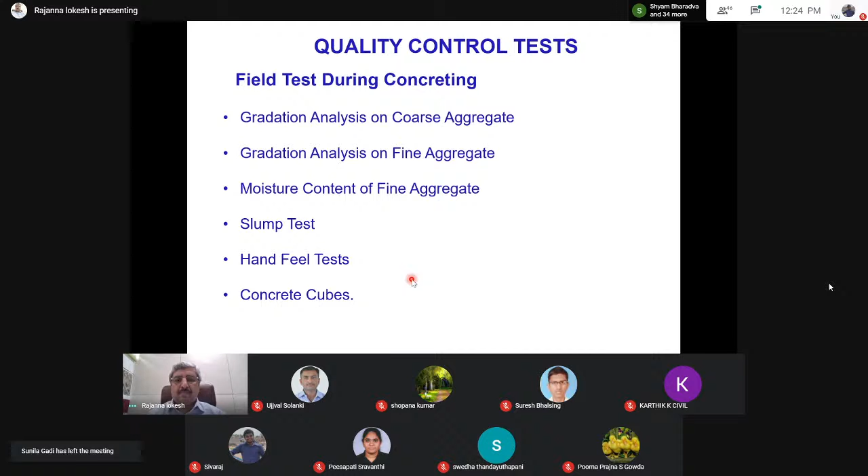So this is a slump cone test that should be carried out. It will be filled in 3 different layers using 25 blows each. It measures the subsidence of concrete. This will help us understand the workability of concrete. Workability is an indicator of how the concrete can be produced, transported, placed, and compacted.

So compaction factor is another parameter which gets into the design. Generally, for high workability, we are going to keep 0.9 as the compaction factor.

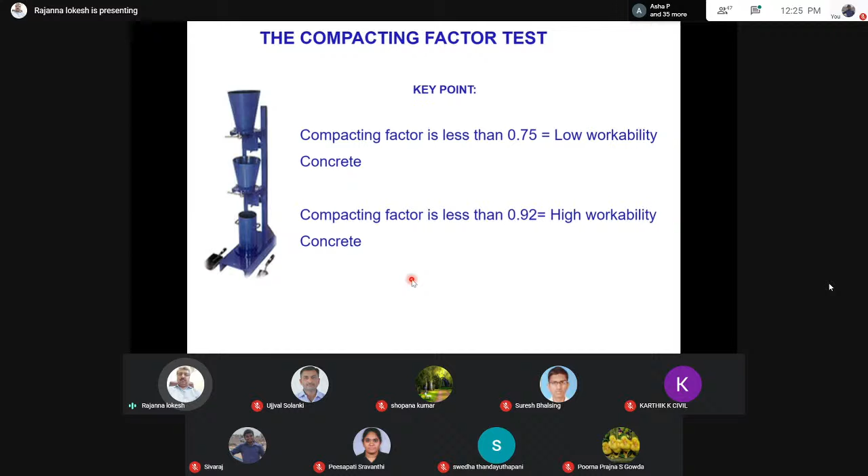You can also carry out some hand feel tests on cement when we visit the site, as well as for the aggregates. When we go to site, we can also take a small portion of sand from whatever we have procured and see if there are any stains on your hand. If there is no stain, that tells us the silt content is less. If there are some stains on your hand, it definitely gives an indication that the sand does have some clay content in it.

Sedimentation test, which I just explained, could be another test that can be carried out on fine aggregates.

Coming back to cement, you can have a hand-feel test even on the cement. If you put your hand inside the cement bag, you should feel cold if it is well within the usable period. Then take a pinch of cement and rub it between the fingers. You should get a smooth feeling between the fingers.

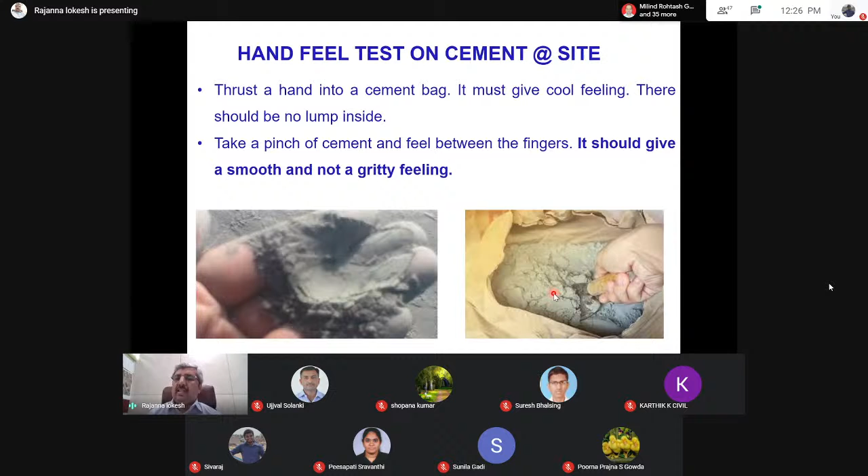Another hand-feel test can be done by taking a small quantity of cement and putting it in a bucket of water, where the cement will float for a certain time and then start sinking. It should not change its color - that's all the more important.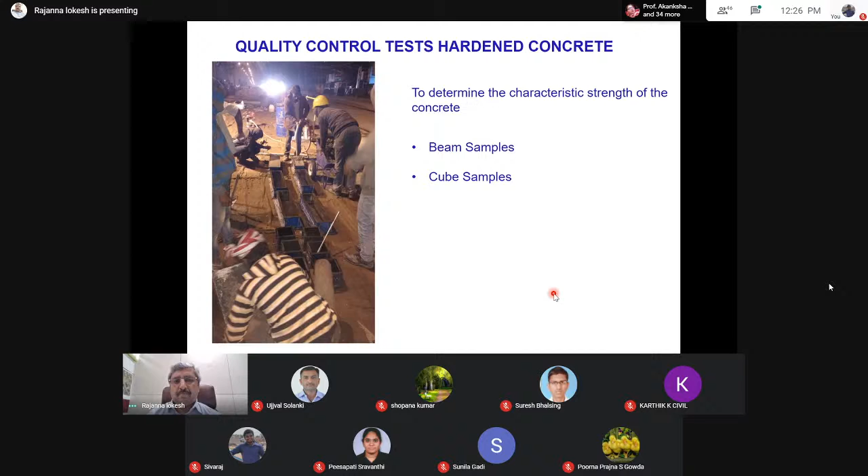So these are the concrete cubes that will be casted at the site and later tested - compression testing on cubes.

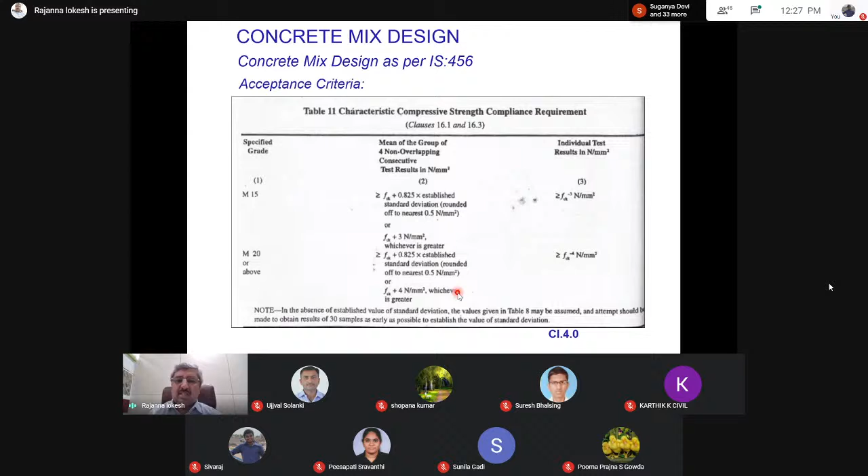Coring can also be done once the concrete has set, after 28 days of hardening, to assess the strength as well as the thickness of the core. Non-destructive tests are also available to assess the thickness as well as the placement of the dowel bar.

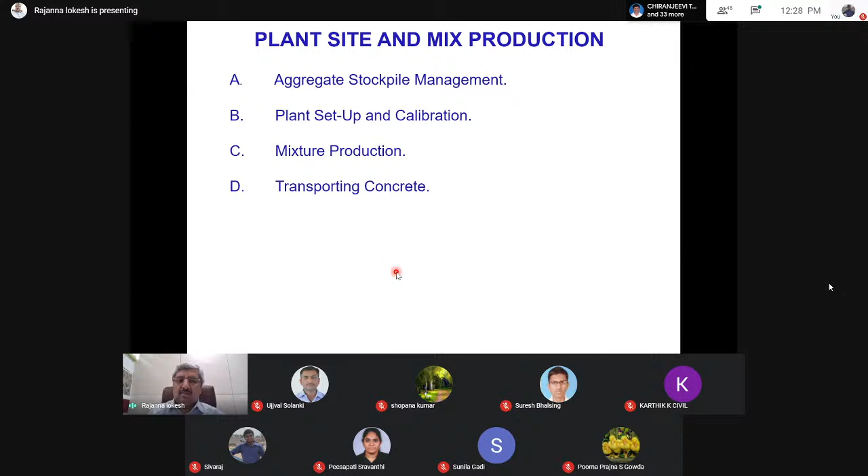So the next parameter is plant site and mix production - aggregate stockpile management, plant site setup calibration, mixture production, and transportation of concrete. When using different sizes of aggregates, say 12 mm, 20 mm, sand and everything, it is all the more important to stack the aggregates in different stack piles so that the required percentage of materials can be used for production of 1 cubic meter of concrete. Proper stack piling technique can contribute to good concrete pavement.

Sieve analysis shall be carried out at the start of the day's work. Moisture in the aggregate as well as in the sand can have an impact on your water-cement ratio, so it is all the more important to check the moisture content before the start of the work.

This is a setup of a batch mixing plant. It is important to calibrate this batch mixing plant because most of the time we are working on volume basis or weight basis, so it is important to calibrate each equipment before being used for weighing.

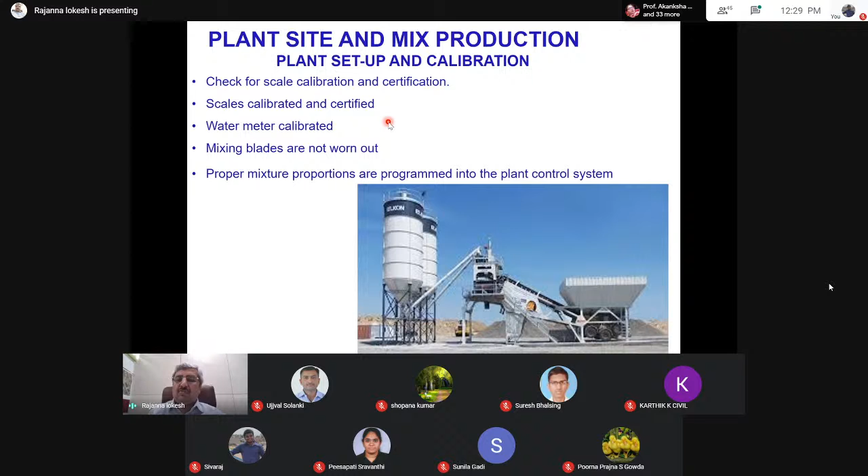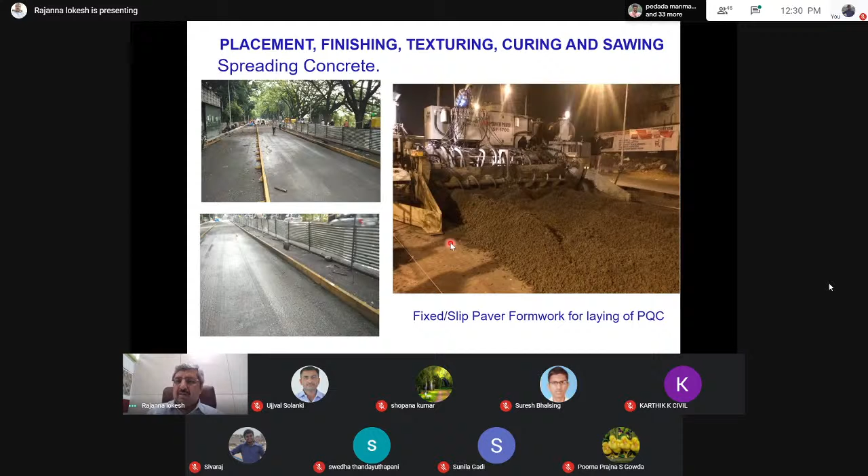This is one such arrangement of a fixed form paver, where you can see the needles for creating vibrations, as well as the drum for giving a better finish. In case of a slip-form paver, it is supported by an auger for proper distribution of concrete.

Then the placing and hand finishing. This operation shall minimize the surface irregularities obtained during the delay in production and placing of concrete. It so happens that it takes around 35 to 45 minutes for a transit mixer to come and deliver, so during that time a small bump is created from where the paver stops and where it starts moving again.

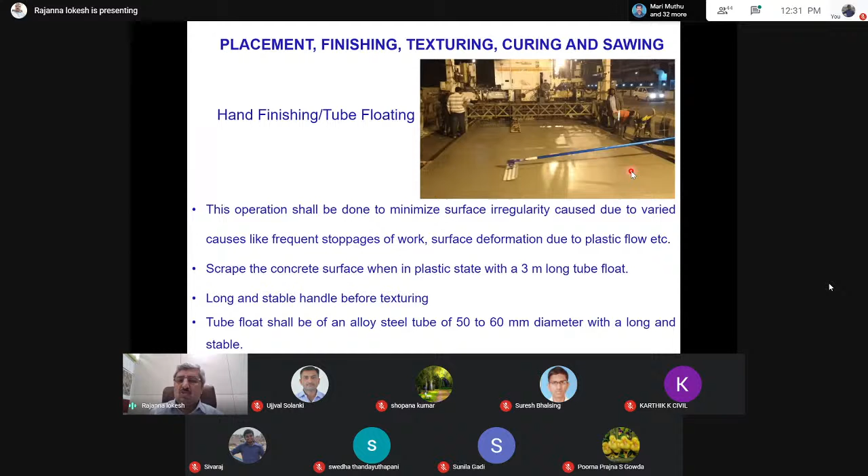Using an operation like tube floating, we press this area using equipment which is a 3-meter long floating edge with a width of around 0.6 to 0.9 meters, so that undulations could be reduced. Next is texturing.

Before the application of curing, it is important for us to do the texturing. The texturing will be done with a 3 mm wide groove for a depth of 3 to 4 mm.

It can be manual, as you can see here, or it can be automated along with the paver. The width of the brush will be around 450 mm, and it is attached to a handle of 3-meter length, so that it can be easily done.

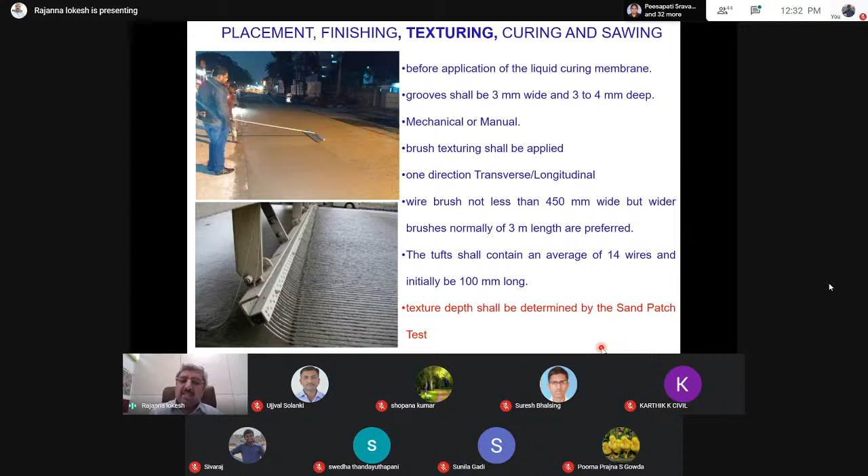The texture depth can be measured using a method called the sand patch method. You identify a known section in the site, clean all the dirt, take a suitable volume of fine sand, and spread it across the designated area. The quantity of sand utilized relative to the percentage of area spread will give us the texture depth.

So these are some of the photographs with texturing.

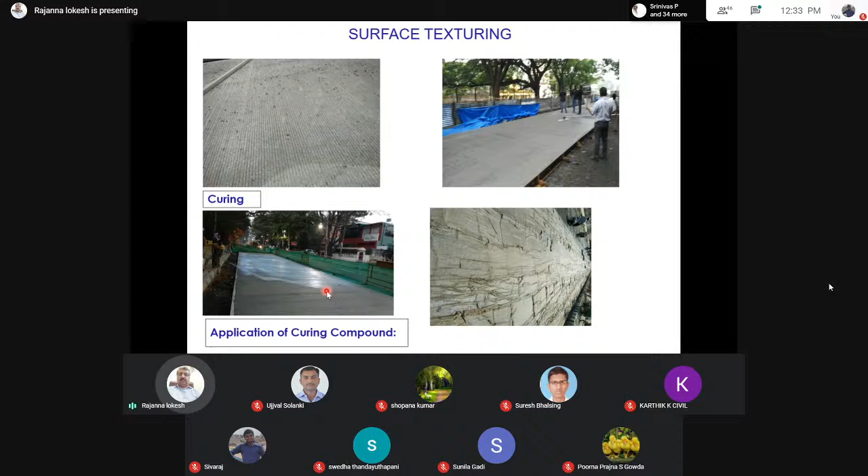You can see the curing being done using curing compound. Curing compound can be resin-based or wax-based. It hardens and forms a thin film on top of the concrete surface, so that there is no evaporation loss in the inherent concrete. It is all the more important to understand and utilize curing compounds which will not have any reaction with the concrete.

Groove cutting shall be carried out for both longitudinal as well as transverse directions. The time for groove cutting is dependent on the strength of concrete achieved after 8 or 10 hours. It is better that we examine the section or stretch after 8 to 10 hours, and then take a call on whether the groove cutting can be carried out or not. In all possibility, around 8 to 10 hours, the groove cutting should be started.

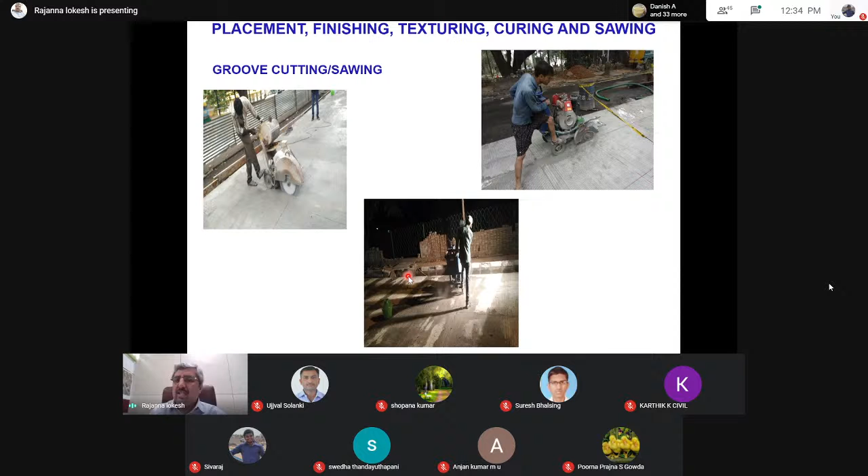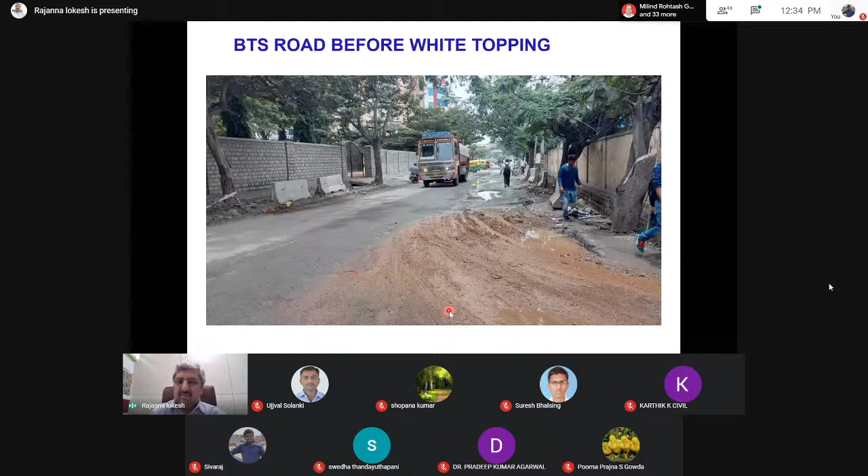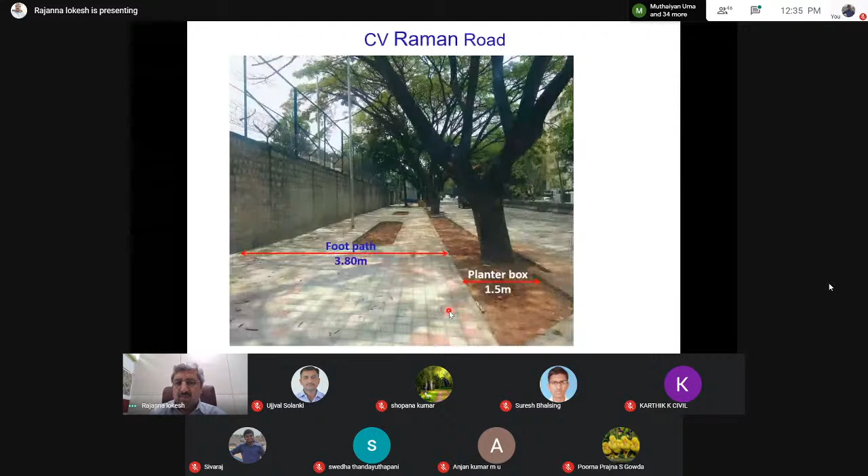Thank you, sir. Thank you so much, sir. Thank you, sir. Any questions I can take, sir?